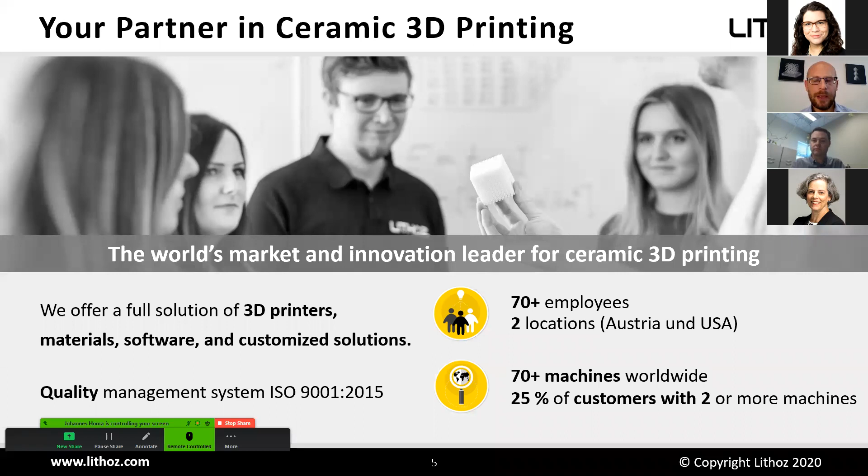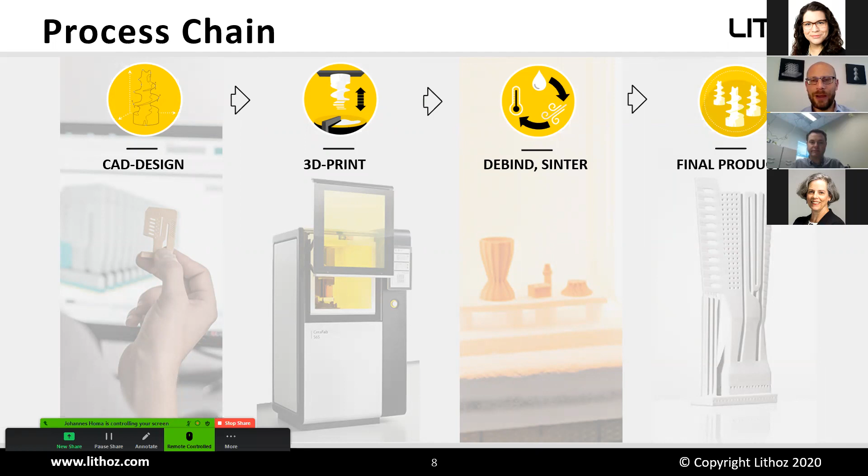Just very briefly, the technology—Dale will go into some details of what he has already done with us—so I want to briefly explain the technology. First of all, our process chain is very simple: we start with the CAD design, then we print it, and then, as is normal in ceramic processing, we debind and sinter, and end up with the final product. But how do we do this 3D printing?

Actually, we are using a lithography-based approach. LCM stands for lithography-based ceramic manufacturing, which means we use light as a structuring method. We have a DLP projector projecting the image from underneath. Where the light hits, the material solidifies, and so we build up layer after layer until we come to the final green part.

And then we have to debind and sinter. The advantage of lithography-based manufacturing is that it's very precise and accurate, and since you are doing the debinding and sintering afterwards and reaching high densities, you can reach very good material properties, as we will see right after.

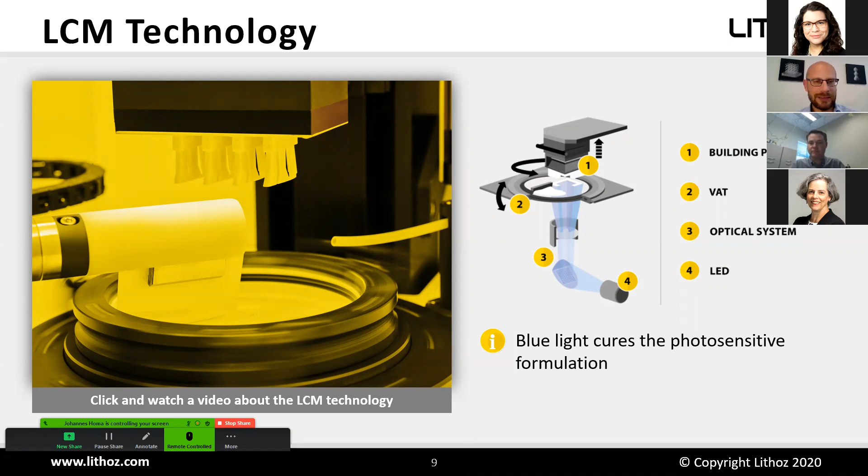Our approach, which is also what we learned from metal additive manufacturing, is to have smaller machines and multiply them rather than have one big one.

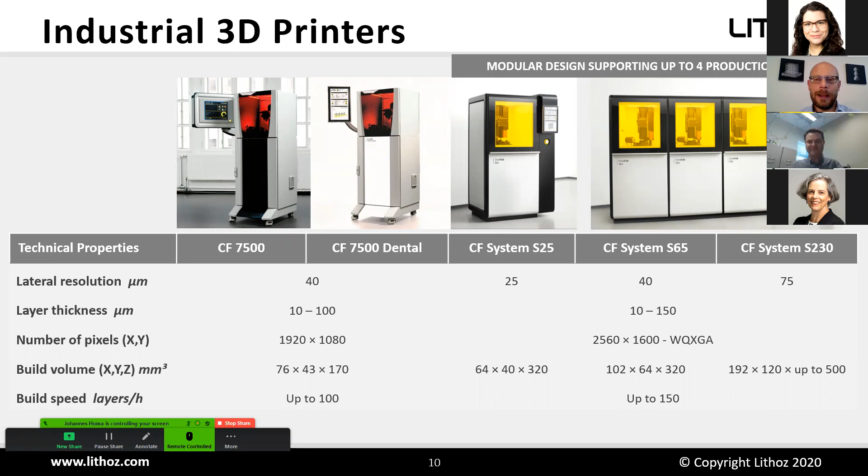Here you have some details about the specifications, but I don't want to go into detail. You can find this information also on our website.

Something I'm very proud of, what we did in the last few months, was working on our multi-material system. The soft market launch has already started.

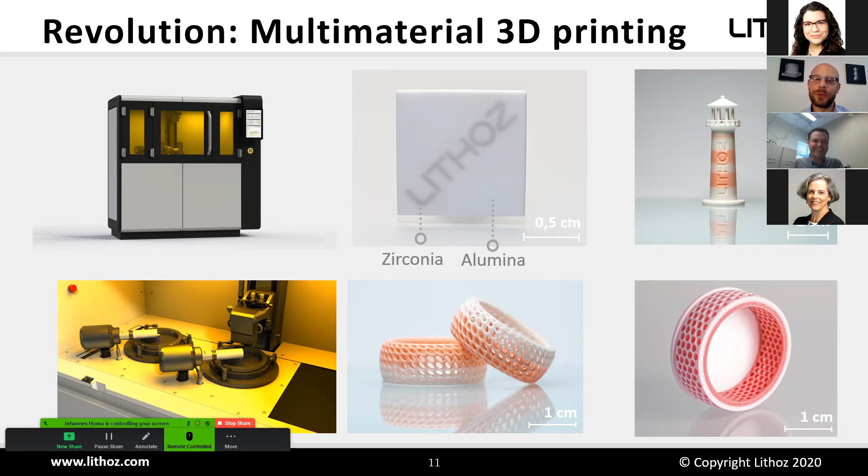But what we can also do is combine different materials, as you can see here. Within the same layer, we have combined zirconia and alumina, and sintered this to full density. This is something we are working on, and what we think will also be a big advantage for the ceramic industry.

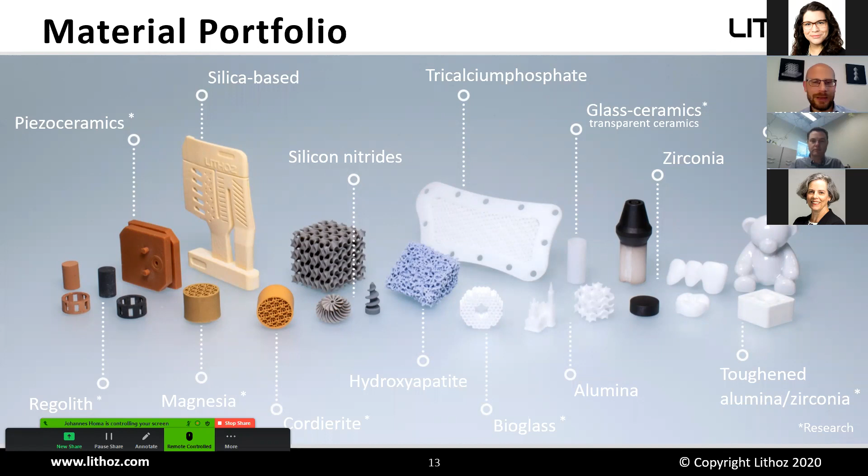But also bone replacement material like tricalcium phosphate, hydroxyapatite, bioglass. So all different kinds of material and all different ranges of materials.

Well below 1 micron. And as you see, all the parts which we are exhibiting, which you see in this presentation, they are not polished or ground. This is the as-printed quality.

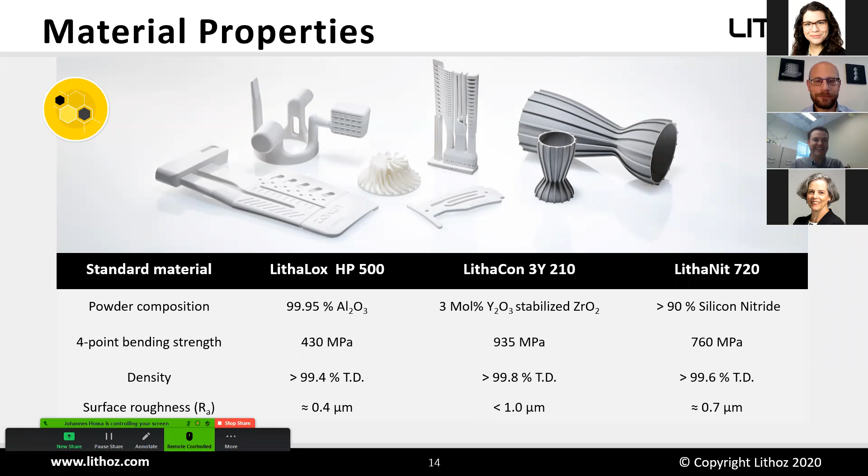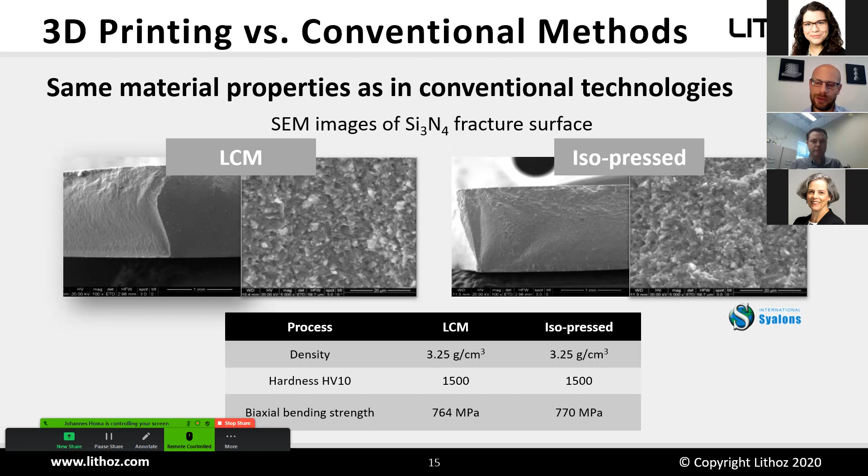Additionally, just to show off a little bit what's really possible with additive manufacturing, and the level where the technology already is, is that we can really make transparent alumina. So we have alumina samples, which we of course hip, and we can get it really translucent.

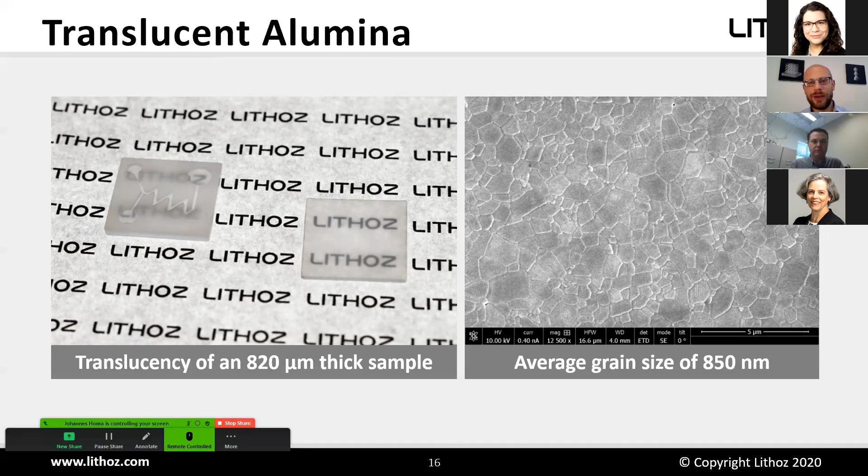So that you can read through it through a 1 millimeter thick sample. And you see also from the grain structure, grain size, that this is very well controlled. And you know, once you have something transparent or translucent, you cannot hide anything. So this is really where I think you see what's going good and what's not going good.

So this was it, very briefly, about the technology. As I said, you find much more information on the internet, but let me now step into this topic of additive manufacturing with a bit of a different approach. Here I've chosen the title, An Easy Process for Ceramicists. You will see why this is right.

We see, and this is for me the key, a trend towards making real products, not only prototyping, but producing with additive manufacturing. So most of the customers who have more than one machine are already producing.

And by producing I mean 5 to 10, or even more, thousand parts per year of the same kind, with applications where they're already working on mass customization, where we talk about much higher numbers at the end.

The market is actually driven by technical applications, and this is my perception. This is why I think partnering is so important, that high-end applications need collaboration along the whole innovation chain.

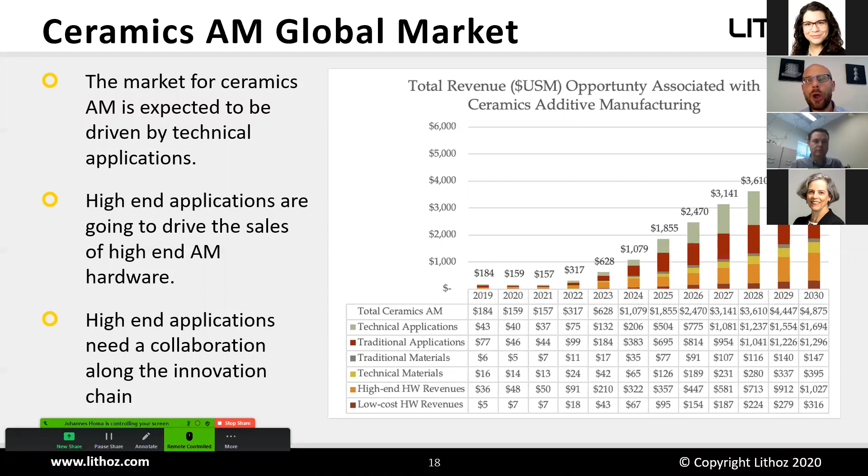Because as you will see in a minute, this additive manufacturing process - sometimes in the media it's said to be very, very easy.

You just take a file and you print it and you are done. But basically, when it comes to production, it is a complex process. You have on the one hand the material, you have the process itself, you have the machine, the equipment, and you have the design. And all these four have to work together.

This is the key to being really fast in the innovation and really fast in developing a new product or getting a product into production.

And this interaction is already well known for ceramicists, and they know that there is always a connection between material, process, equipment, and design.

Therefore, this is one of the reasons why I think it's easy for ceramicists to get into additive manufacturing, other than, let's say, metallurgists or people working with metals - they are not working with powders in most cases.

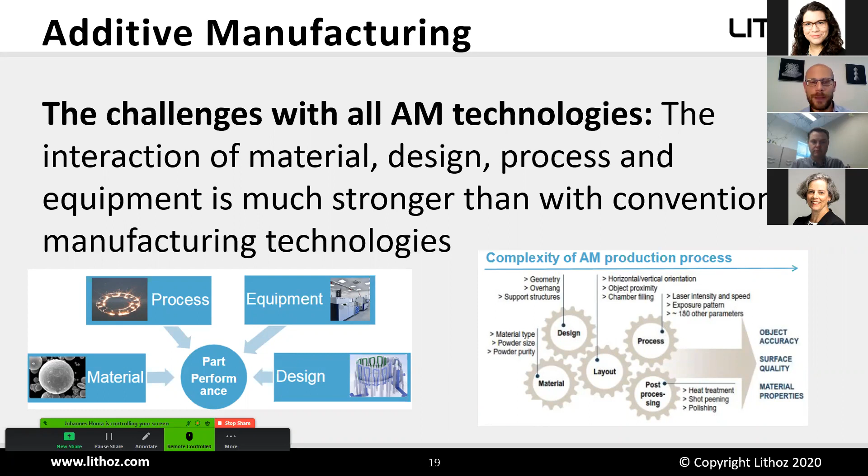But of course, one of the key questions is, why should we get started now? I mean, it's a young technology and it's not yet mature, so why should I already start? I mean, I don't have any applications.

But I think, and this is what we already see, waiting is really a risky strategy. Because in the year 2020, up to date, we already have pioneers working in additive manufacturing of ceramics, and we have to say they are now up to 8 years ahead.

And these early adopters are creating a significant business advantage for themselves, and they are maturing the technology also in their environment.

So this is important. You cannot just say, okay, now I have a 3D printer and now I'm expert in additive manufacturing. You have to get the system, start working with it, implement it into the whole company, the whole research organization, and learn by working with it.

And what we see, and this is really something where most companies and people don't think this is happening, but we have already proved that these things are happening.

Customers are implementing additive manufacturing technologies, or even working on it, by intentionally surpassing their current suppliers. So they are looking for someone who already has experience in additive manufacturing.

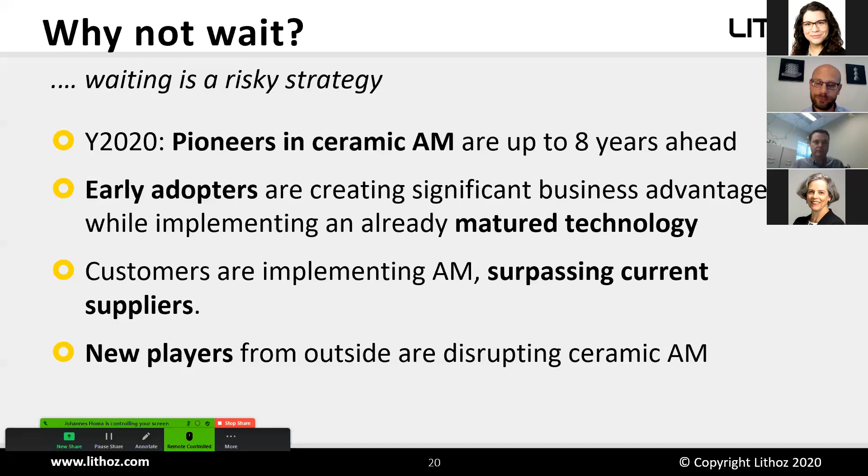Yeah, I think the market and the technology are ready. There is still work to do, mainly for yourself, to get started with this technology and learn with it.

And the effective implementation of the technology of an innovative manufacturing technology requires full commitment. So I think, because if I buy a printer and leave it for a while, that's not enough.

It's really, as Dale did or as Sandia did, about really working closely with this technology, trying to find where the limits are, what can I do with it. This is important. And then you can also steepen your learning curve by training, by real work on concrete challenges.

I think this is very important. This is what Dale and his team have already experienced, that this is important to work with. As with any other technology, as with anything you need to learn, you need to do training and work on it.

And you need to also have room to play around a little bit with those issues. And then the materials are already available. As you see, many more are in development or experimental status, and they will come up if needed. End users are looking very openly for technology partners to innovate their products and move forward.

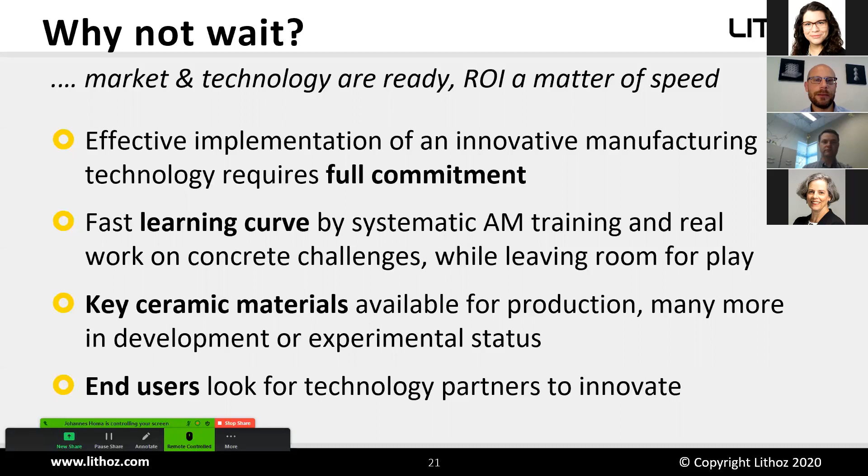That was one too much. And I think, how to start with them? Why can you do so?

I try to also implement some things from outside, from a Deloitte study, where they say to realize the full potential of additive manufacturing, organizations must learn and implement the new technology and focus on developing a capable, skilled workforce. This is what you can do in a partnership, to work together and build up a skilled workforce, because this is key to innovation and success.

And here also is KTM, an Austrian motorcycle manufacturing company. They did a great approach. They installed the first system, made it accessible for everybody at no cost, and then they came up with a lot of new ideas of what can be done with additive manufacturing. So you need to engage the people, but you also need to leave some room for improvement.

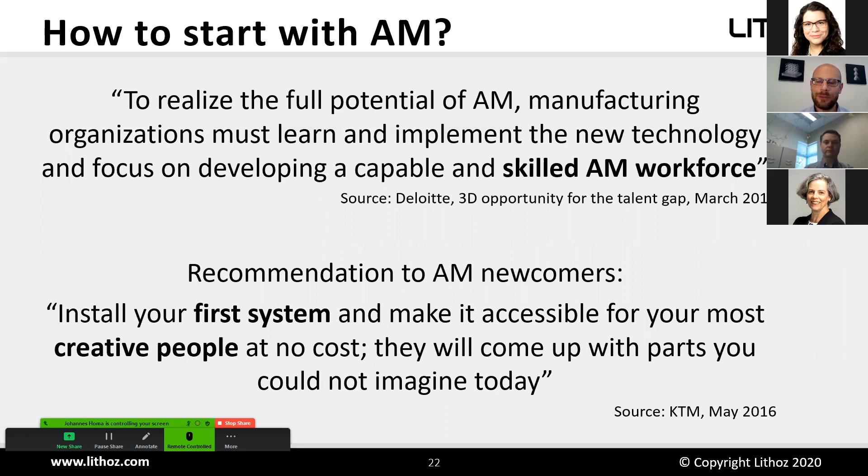Summarizing this a little bit, why is it easy for ceramicists to get started with additive manufacturing? First of all, the entry costs are much lower. We see metal systems now in the range of a million dollars. Some are lower, but you need a lot more equipment. Usually all ceramicists already have their furnaces and everything needed.

The AM benefits are basically more pronounced in ceramics because machining is much tougher than in metal. So once we in the ceramic community start to work on additive manufacturing, we will see things moving from traditional machining to additive manufacturing. We already see this in injection molding, where some companies with lower part numbers per year are switching completely from injection molding to additive manufacturing.

And what we already have as an advantage is that additive manufacturing in general is already mature. The redesign, the software support, all these initial hurdles have already been mastered in metal or plastic AM, and all these things already exist. So everything general to all materials is already in place, and end users are already prepared for additive manufacturing. Sometimes they're just waiting for ceramics to also have these advantages as well.

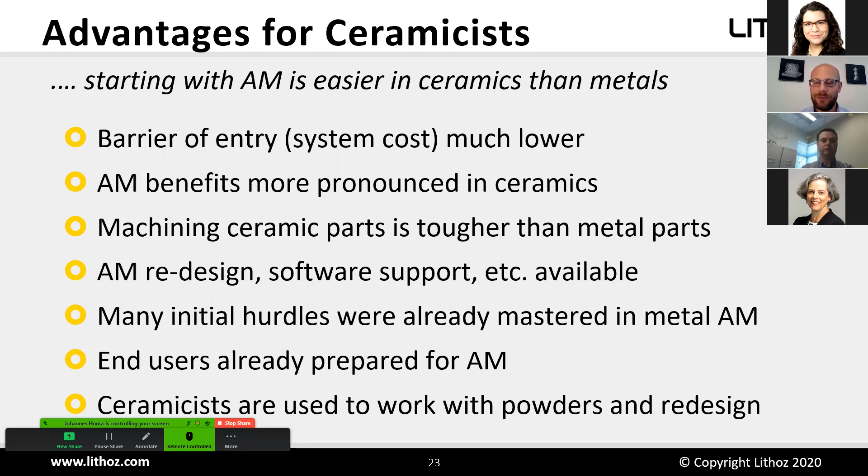They are relying on the in-depth background. In the beginning, I think it's very important to have a strong exchange of ideas and strong communication, to practically demonstrate things and really get a direct benefit in the project. That's really important along the whole process chain.

But what we see is the more we are involved in projects, the faster the customers are, and the better the output. So this is really our idea, that we think in partnerships, and we offer very openly our know-how and experience to support your innovation.

The agenda for my presentation today is a brief history on additive manufacturing at Sandia National Labs, evaluating and exploring advanced manufacturing of ceramics, identifying and partnering with Lithoz, validating the Lithoz technology, acquiring a Lithoz printer, and some operational studies that we've performed, and then our future plans using this technology.

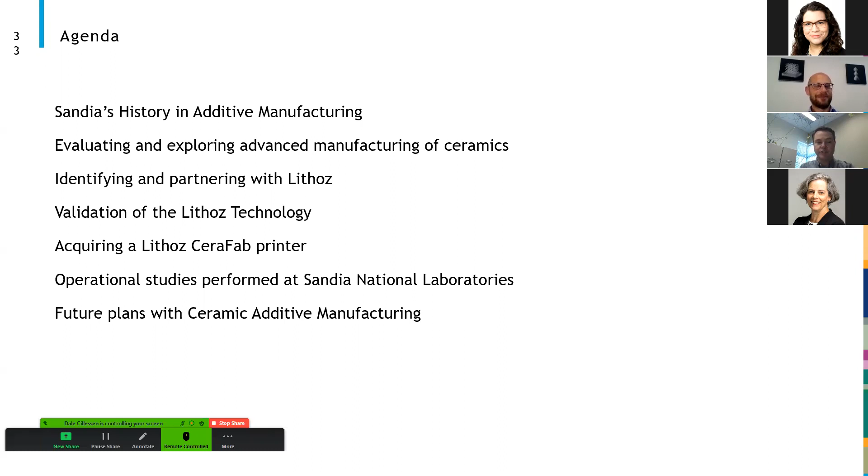We have a long history in additive manufacturing dating back to the 1990s. Probably one of the more known is the LENS technology, which is laser engineered net shaping, also known as directed energy deposition, using metal powders to flow into a laser path to create a solid metal component.

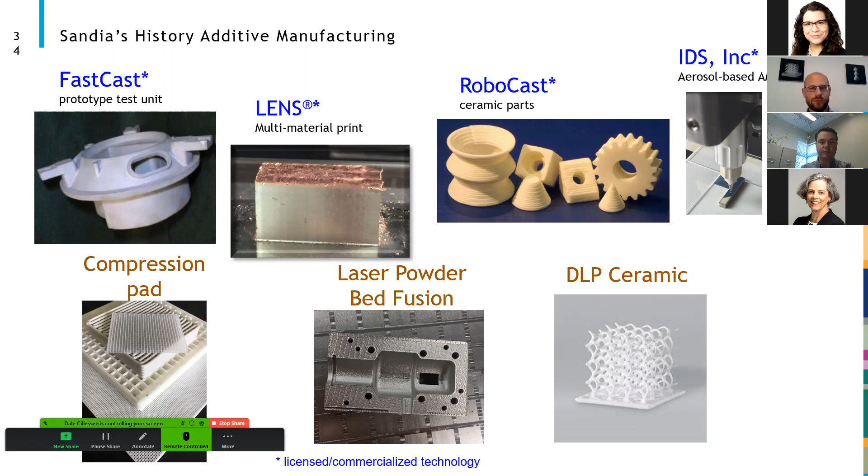In the ceramics world, the RoboCast process was licensed and developed here at Sandia National Labs, and is a company available here in Albuquerque. More recently, in the additive manufacturing space, is the IDS incorporated technology. This is using an aerosol jet, printing nanoparticles onto different substrates. We also have experience in compression pads, laser powder bed fusion, as well as the Lithoz technology, digital light ceramic processing.

Prior developments in ceramic at Sandia National Labs, in addition to the RoboCast process, shown here below is an extrusion type process. This process was very successful in creating the structures and the geometry that were required. However, in the application space and for the design engineer's needs, it didn't meet the current requirements.

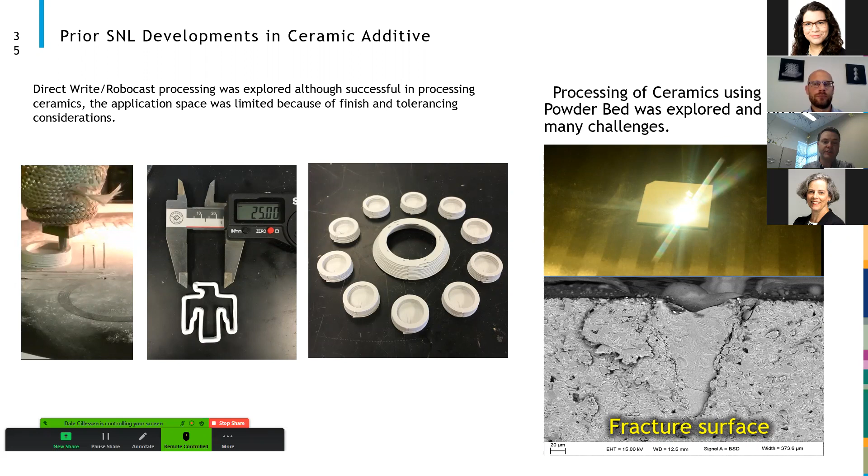We also did some experimentation using laser powder bed processing, traditional metal additive manufacturing machines, to try some different challenges with ceramic processing. Due to the rapid heating and cooling of the laser, we experienced nothing but fractured surfaces.

In 2017, Judi Lavin and team identified Lithoz and established initial contact with them. Judi remains a key asset to development of ceramics here at Sandia. And through her efforts, teaming with Lithoz, we've developed custom ceramic slurries utilizing Sandia's custom ceramic material. The ceramic material has been available since the early 2000s and is currently available in powder form.

Teaming with Lithoz America, we have introduced our powder ceramic into the Lithoz slurry technology. Lithoz was identified because of their capability to produce fully dense, high tolerance, high quality surface finished components. But the biggest part of this was to develop a relationship that was responsive in our custom material development.

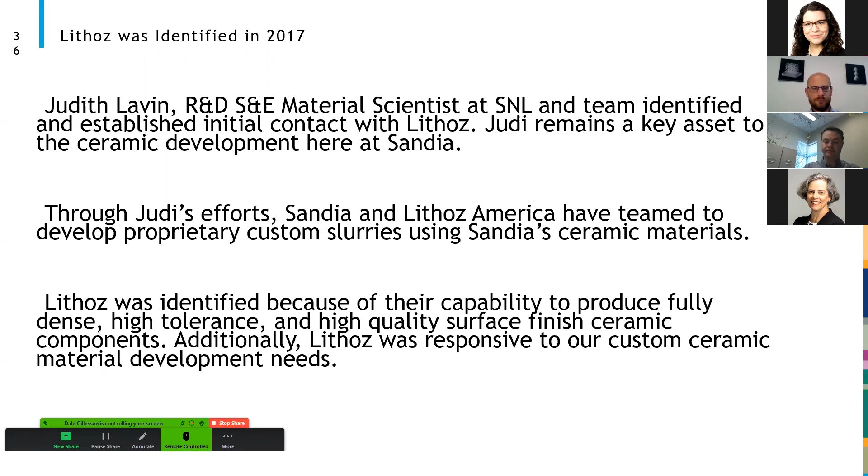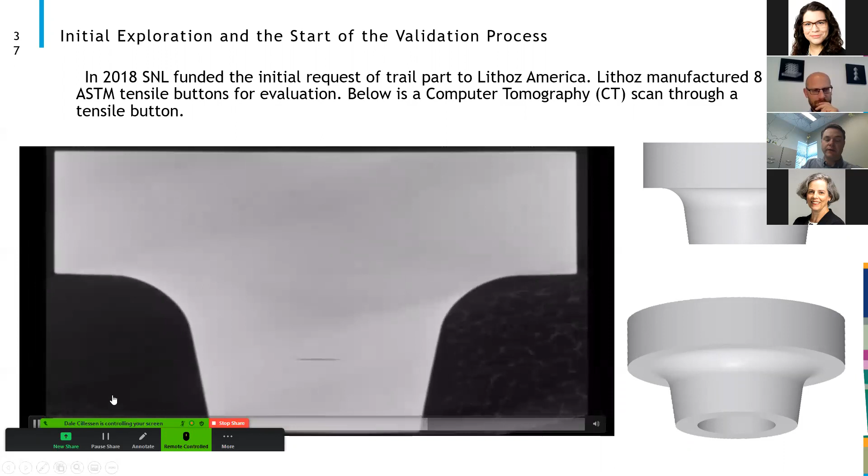After success with the tensile buttons, we looked at other geometries that were critical for our components here at Sandia. In 2019, we engaged them to develop our ceramic material within their slurry and print some components that meet our requirements as far as shape. The printed components were printed using our ceramic and brought back to Sandia for evaluation. The evaluations determined that not only did they meet the vacuum hermetic seal requirement, but they also were capable of meeting a dissimilar braze.

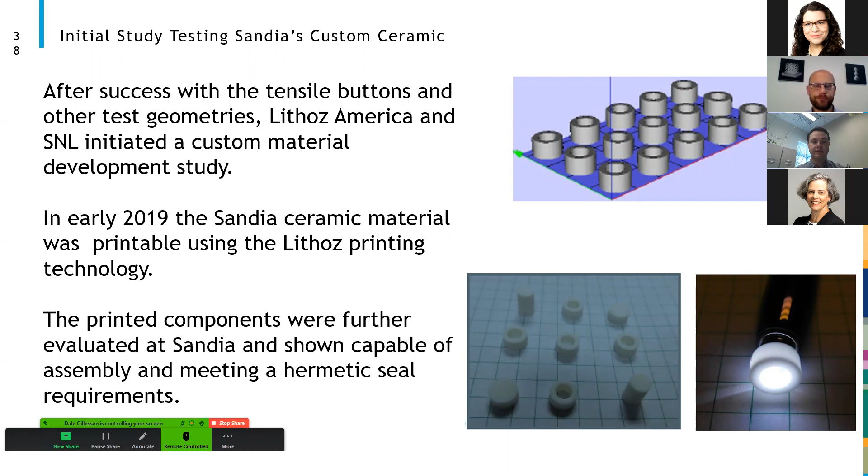Following the initial study was a large wall thickness study. The wall thickness of these components was approximately 8 millimeters in sintered size, rather large cross sections for this printing capability. But we did observe some potential cracking across the cross section, and it posed significant challenges in dealing with these large diameter components.

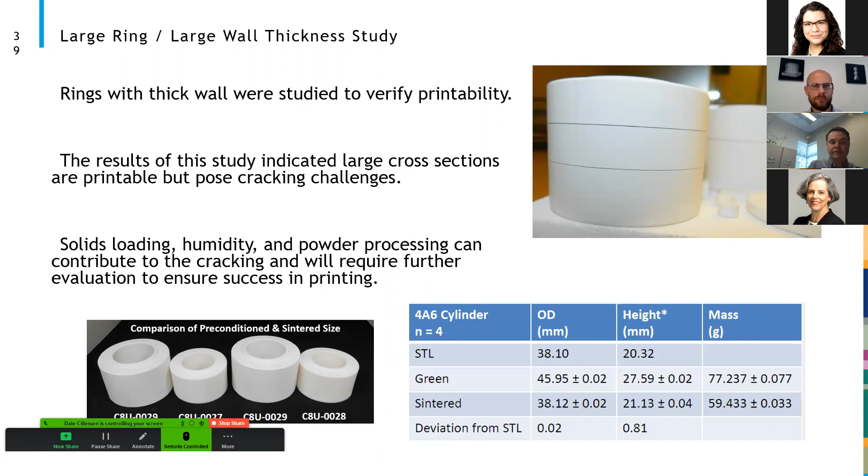Having about a 50% success rate and a better understanding of what variables we needed to control, we identified that solids loading, humidity, and powder processing can contribute to the cracking and will be evaluated further if these components are desired for future applications.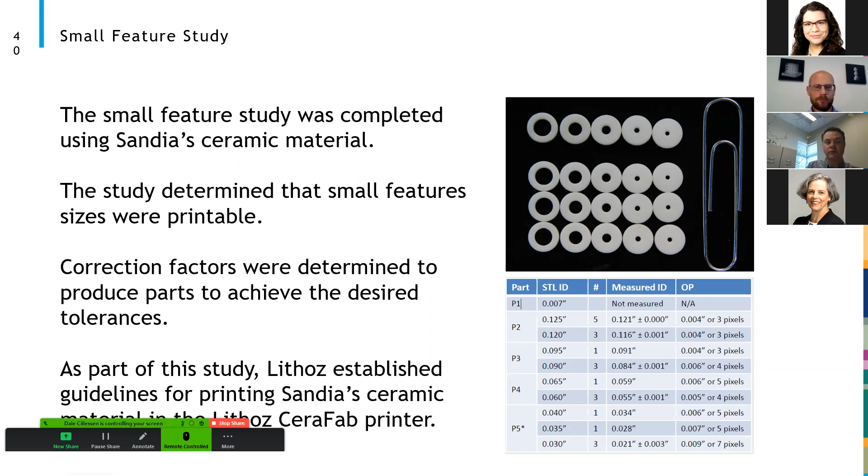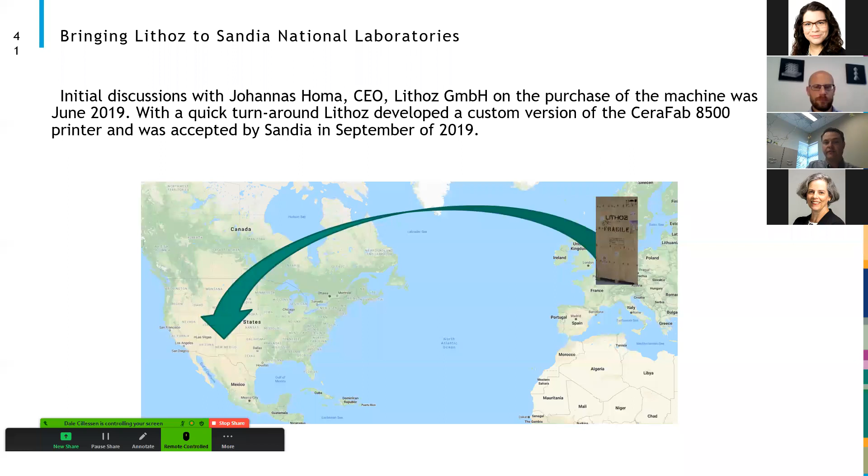Based on these evaluations, we determined it was appropriate to bring a Lithoz CeraFab printer here to Sandia. First engagement with Johannes was in June of 2019, and in September we accepted our CeraFab 8500 that was custom made for Sandia National Labs. The custom part of this printer is observable here on the right with the bottom PC unit, the separate data management system that's unique for us and meets our cyber requirements.

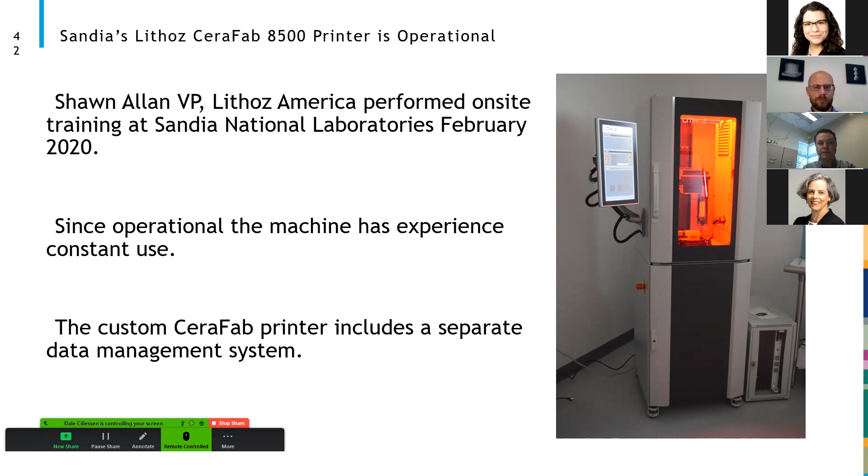The machine was placed in operation in February of 2020. Shawn Allan, Vice President of Lithoz America, was on site here in February, and the machine has seen constant use since it's been in operation, even through the pandemic we're currently in.

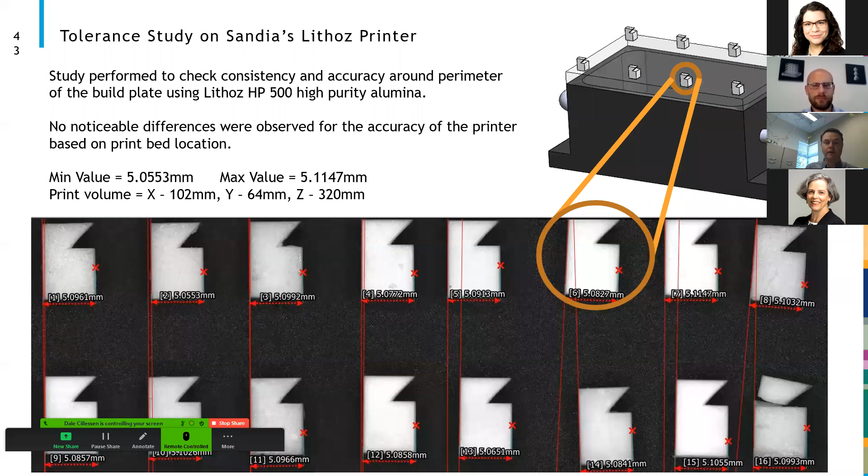The initial study that I performed was a tolerance check around the perimeter of the build plate using a standard Lithoz material. Noted on the bottom right is a broken component that was damaged during post-operation and not part of the printing process. The most noticeable difference was a 50 micron deviation, regardless of placement on the build plate, and the parts were determined to be very accurate. Only one measurement is shown; these components, however, were measured and quantified in many other directions.

The next study was done using the Lithoz printer with a 20 thousandths diameter hole, as mentioned earlier, a desired feature here at Sandia. This component is approximately 1/4 of an inch in diameter and 1/4 of an inch in height, with a clearance hole of 20 thousandths of an inch through, perpendicular to the build plate. As seen, the initial component had overpolymerization within the internal hole with zero adjustments to the STL or CAD file. Accommodating this can be done in two different ways.

One, you can change the settings within the machine to adjust the pixels to account for the overpolymerization. The overpolymerization, if adjusted in the pixel settings, can affect the outside diameter. The outside diameter was within tolerance for the desired component. So to not adjust the outside diameter, we adjusted the CAD to meet our requirements, creating our own internal guidelines on printing very fine, delicate through holes through this component.

By a 25 thousandths of an inch adjustment in size, we achieved our first clearance hole of 13 thousandths of an inch through the component, visible all the way from top to bottom. It wasn't until we reached a 35 thousandths oversize based on the CAD file did we achieve our desired 20 thousandths of an inch in diameter. This was measured at both the top and the bottom, and it was very consistent across the measurement.

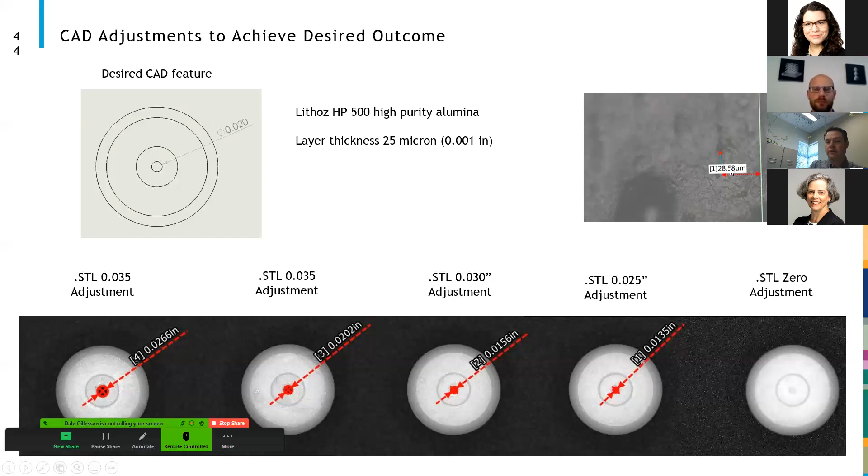During the same printing, we also verified that the layer thickness was within specification from the printer. As you can see here, we have a 25 micron or 1/1000th of an inch program setting, and we achieved 28 microns, and the 3 microns would be negligible based on the measurement criteria.

Following, most recently, this was within the last few weeks, we've printed this high tolerance vacuum fixture. This high tolerance vacuum fixture has some very detailed geometry of a 15 thousandths wall thickness, or 381 microns. And the resultant wall thickness we achieved was slightly larger. That's observable by the slight overpolymerization on these ends. We're down very, very small scale.

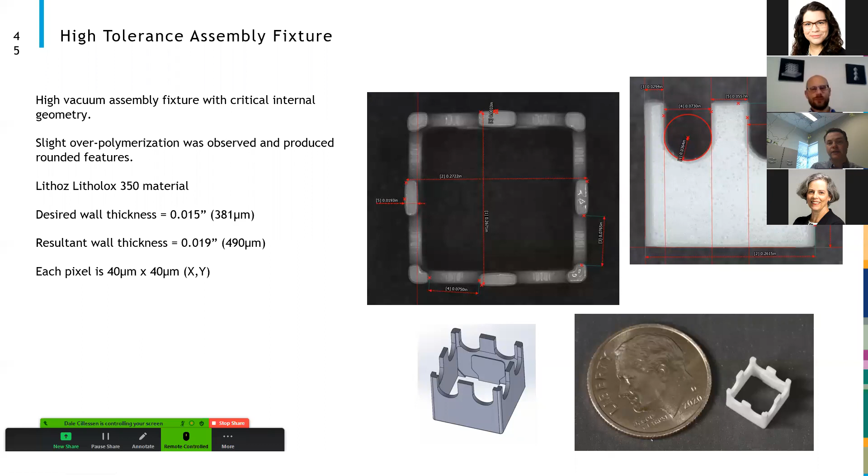But the critical feature for this is being evaluated by the design engineer, and it's actually on the internal of this component shown on the top right. You can see that little step within this, and the evaluation is being conducted to determine that it meets their fixturing needs. The rest of the geometry associated with this component was within the specification required by the design engineer.

Thinking outside the box, design engineers, or experimentalists, now have the opportunity to experiment with new ceramic designs and potentially simplifying assemblies. This little testing apparatus was designed and developed and delivered to the customer within a couple weeks, and it replaced metal clamps, a ceramic insulating tube, a thermocouple insulating tube, and fasteners with one single part. The innovative design of this component was to allow assembly onto an existing subassembly to do a thermal measurement over the existing part.

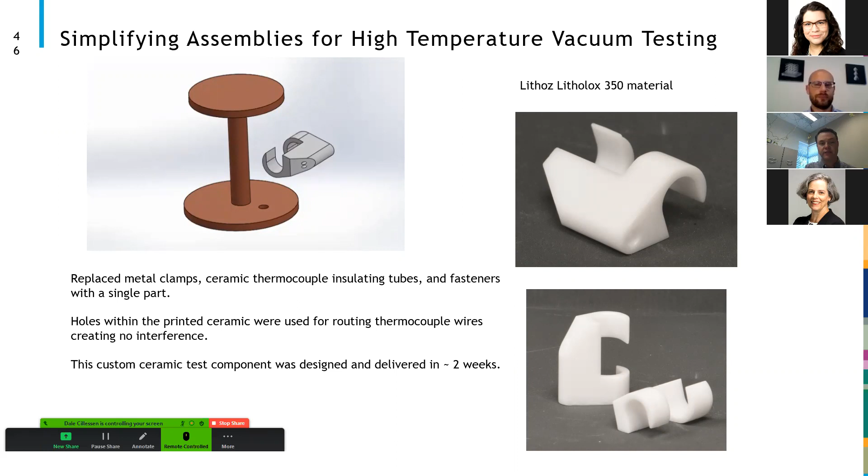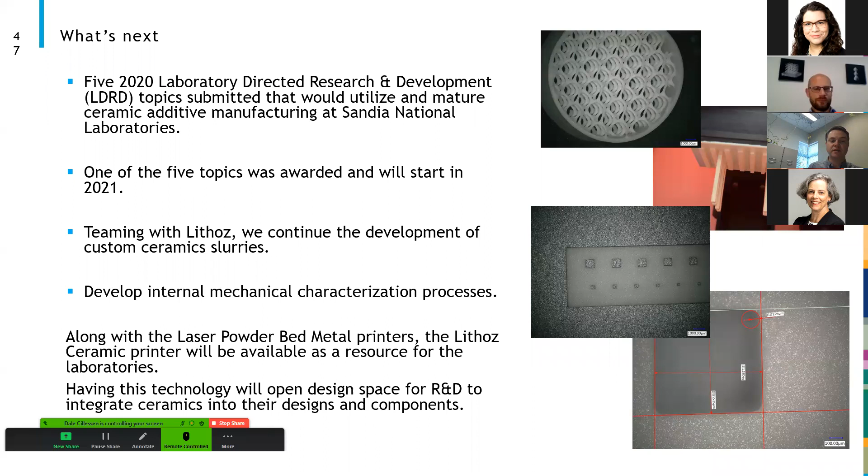We're also internally developing our own mechanical characterization processes to ensure that we develop and have the right ceramic for the right application. Along with the laser powder bed printers within my facility, the Lithoz printer will be available as a resource to others within the laboratory, and it will push the limits and open up new design space for research and development engineers here at Sandia.